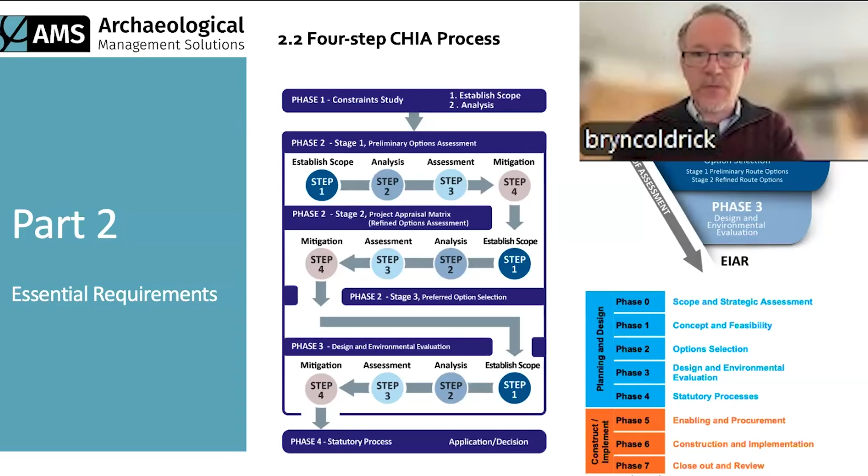Another concept that's important to understand is that as the geographical scope decreases, the intensity of the research increases. So in phase 1, for example, we start off with a very wide constraint study area. We're trying to identify the key constraints, the known constraints in that area. We're not trying to identify absolutely everything—it's impractical and unnecessary to try and do so at this early stage.

But then as we go to phase 2, where we have our option corridors, we are then undertaking more enhanced fieldwork. So we're doing site inspections, we might be doing some geophysics, and we'll cover some of the things we might be doing there. We're increasing our focus on those corridors. Then by the time we get to phase 3, where we have a preferred option, proposed project area, the intensity of the research increases even further.

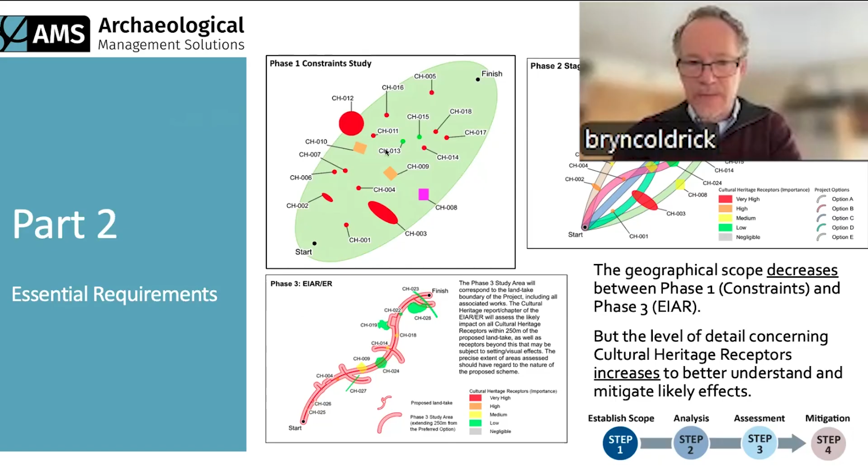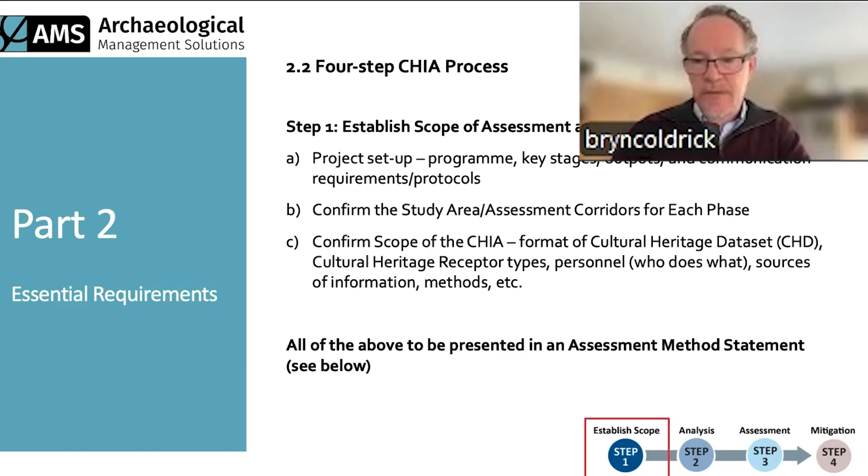If we look at the 4 steps in a bit more detail now: step 1, establish the scope of the assessment and confirm the study areas. This is all about the normal project management stuff we'd do on any project. We agree on the program, identify the key stages, the outputs, the communication requirements and protocols. We confirm our study area or corridors if we're at phase 2 and phase 3, and we confirm the scope - the format of the cultural heritage data set, the types of receptors we're looking at, who is looking at what, their credentials, the sources of information, the methods, and so on. All of this is summarized in a document known as an assessment method statement.

I won't go through everything on the screen - this is a screen grab from the guidelines, but it sets out what's required in an assessment method statement. If there are archaeologists on the call used to preparing method statements for Section 26 excavation licenses, you'd be familiar with the concept. It's a concise document summarizing the methods that are going to be followed. It's also a bespoke document, particular to the project and the receiving environment. It can refer to the guidelines we're discussing today, but it doesn't need to repeat them. This is about demonstrating familiarity with the process and conformity with the methods, but also setting out specific things like who is doing what, how the various individuals on the team relate to one another, the steps, the resources, the program. So it should be a practical, focused, project-specific document, but concise as well.

An important thing to note is that these assessment method statements are required for each phase and stage of the process, and the methodology will evolve from one stage to the next.

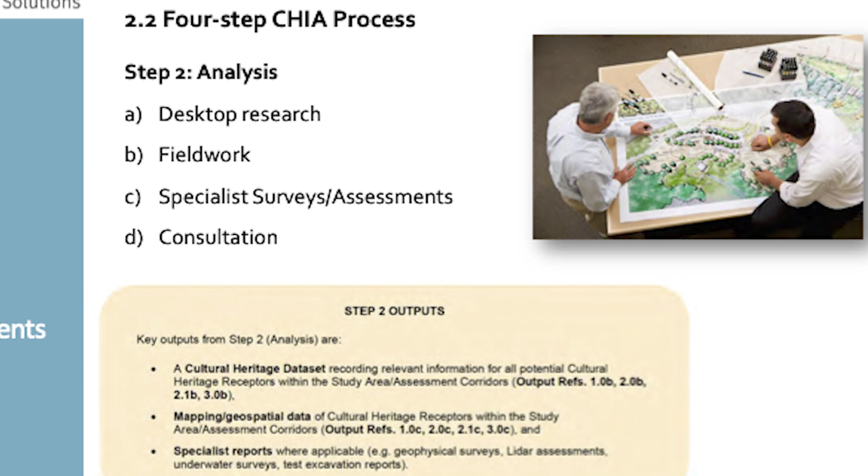So in terms of analysis, what does that involve? Well, it involves desktop research. It will involve fieldwork, not necessarily at phase 1 constraint study, but certainly in phase 2 and phase 3. It may involve specialist surveys and assessments such as LiDAR analysis and geophysics, depending again on the phase and stage, and it involves consultation. The outputs from those will be the cultural heritage data set, where this information is stored and managed, geospatial data and mapping, and if specialist reports or surveys are involved, reports for those.

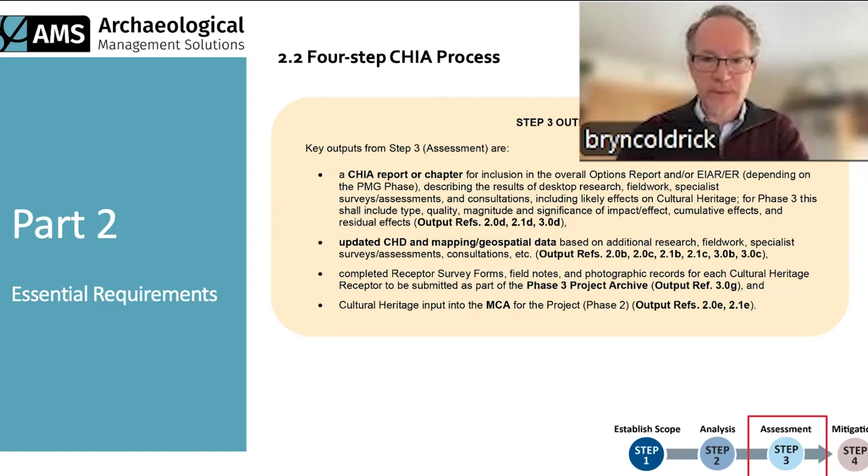Step 3 - this is something Joanne will talk about later, so I won't go into too much detail - but this is about assessing the effects and the outputs of those. Again, you're generating reports or chapters, updating your cultural heritage data set and mapping. You'll be producing a project archive if you're at phase 3, the EIA phase, and you're also having input to other forms of assessment and appraisal, such as the multi-criteria analysis, which are processes described in other TII publications.

Mitigation measures, as I mentioned before, under the EIA directive, are required to avoid, prevent, reduce, or remedy or offset significant adverse effects. These are the types of mitigation measures we need to think about. Built-in mitigation, or mitigation by design, is avoidance - we've identified key constraints, and the design team hopefully will avoid as many of those as they can. If there's a project in close proximity to a cultural heritage receptor, prevention might be one of the measures - for example, fencing off a site to make sure there are no inadvertent impacts. If an impact can't be avoided completely, perhaps it can be reduced. And then finally, if those impacts are unavoidable, we would recommend compensatory measures to remedy or offset the effects - things like excavation and then dissemination of the information that arises from that. It might be interpretation, it might be enhancement, and we'll look at some of those examples in a moment.

So for step 4, mitigation, we're identifying the appropriate measures. We're documenting all this in a cultural heritage mitigation plan, and that then feeds into the schedule of environmental commitments and the construction environmental management plan.

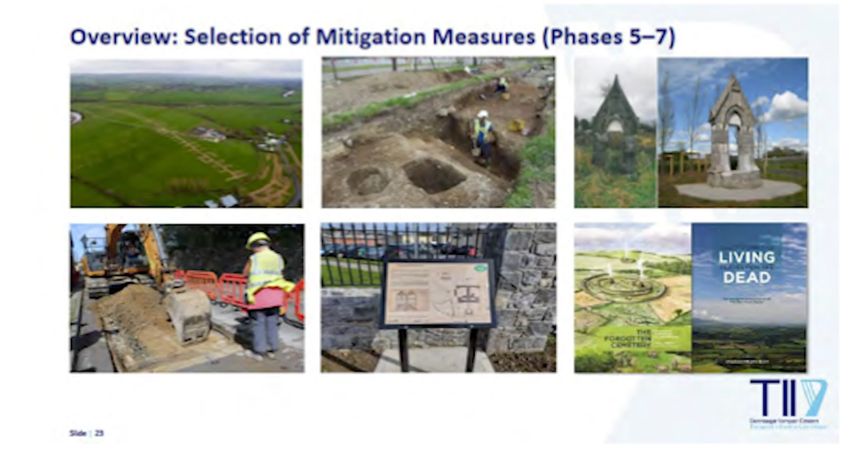So a lot of us on the call are very familiar with the sorts of mitigation measures when it comes to cultural heritage. For archaeology, there's testing, stage 1 testing post-consent once a project is nearing construction, as part of enabling works to identify any archaeological sites not previously picked up, and testing of anomalies picked up on geophysical surveys but not tested as part of the environmental evaluation. Then excavation, and the preservation by record that I mentioned earlier.

And then we have enhancement measures. There's an example there on the screen of a roadside feature, a water feature, a monument being restored as part of a project to offset some adverse effects elsewhere. And then the bottom middle there of providing interpretation is another form of enhancement compensation. If it's a greenway, we'll come back to the opportunities for greenways in a moment, but obviously this would be a core aspect of that.

Publications are a huge part of what TII does, making sure that all the information and new knowledge generated through this work is put out into the public domain for the public good. And then, monitoring for any residual risk of previously unidentified archaeology being discovered on the scheme.

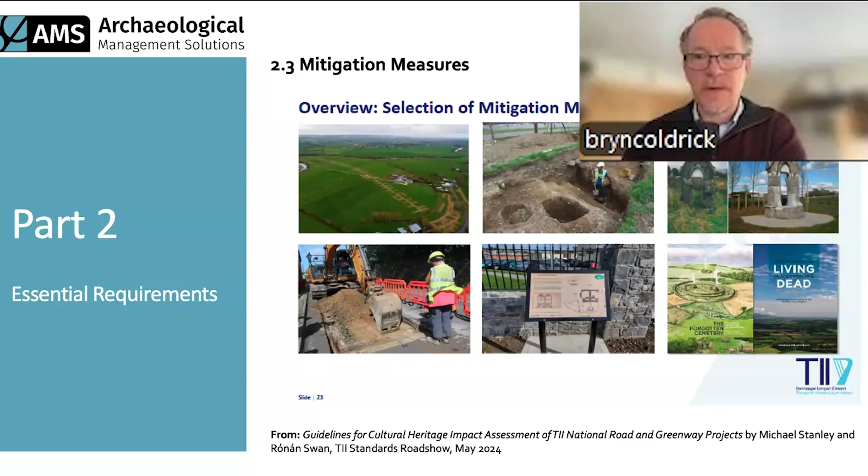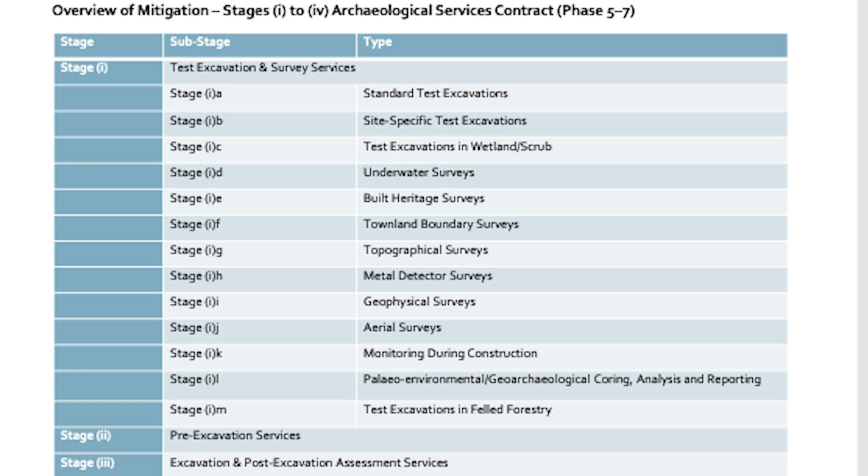And these mitigation measures then are embedded in the contracts that go out for phases 5 and 6. We're all very familiar, I'm sure, with these services that are on the screen if we're working in this industry - your test excavation and surveys, pre-ex excavation, post-excavation analysis, very important, and then dissemination of the findings and results.

So in terms of tasks and deliverables then for each of the phases, phase 1 is your constraint study for road schemes, and these are the main tasks. I've already mentioned the first task for each of these phases and stages will be preparing your assessment method statement and confirming your study areas and methodology and so on.

Then you will be carrying out your desktop research using the sources of information suggested in the guidelines, but not confined to that - they're non-exhaustive lists of suggested sources. We are identifying and mapping the receptors, identifying key constraints, particularly at the phase 1 constraint study, preparing the cultural heritage data set, and identifying any transboundary issues that need to be considered.

So if you're operating close to a county boundary or the Northern Ireland boundary, there may be transboundary issues to consider, and certainly in consultation later on. And you're preparing a constraint study report. Now for greenways, the constraint study report will generally be at phase 2, whereas at phase 1 you're generating constraints mapping primarily, but the constraints and opportunity report for greenways will be finalized in phase 2.

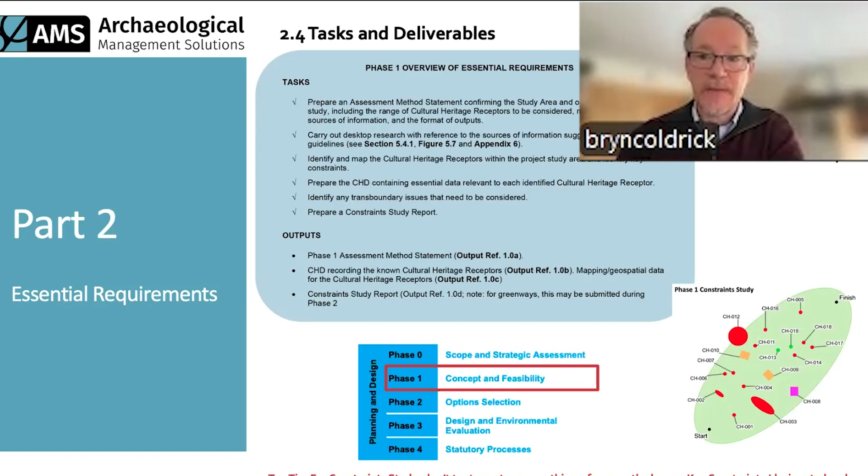So again, this is an example table for a constraint study report where we've taken some of the information from that cultural heritage data set and presented it in tabular form for the report itself. And you can see at this stage of the process that the information is fairly concise.

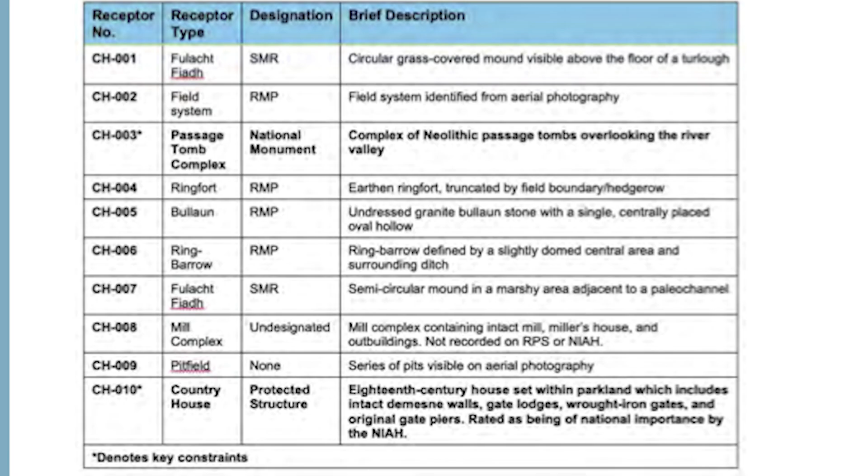Okay, so as we move on to phase 2, stage 1, the preliminary options assessment. Again, our tasks involve doing our assessment method statement again, repeating that process to confirm the methodology. We're undertaking further research, now focusing on those feasible route options that have been presented to us by the design team.

We're carrying out at this stage a survey from accessible land, getting familiar with the landscape, with the receiving environment. We're doing targeted site inspections. We don't need to do full walkovers of all the route options at this stage - that will come later on the preferred route. But we are doing targeted site inspections of specific sites that we want to go check out.

We're updating our cultural heritage data set with the information that we've gleaned from all this work. We're liaising, of course, with the project archaeologist, project manager, and other professionals on the project team. We may be commissioning specialist surveys, for example, geophysical surveys for particular things that we want to go check out. We might do LiDAR analysis as well at this stage.

And then we're reviewing the options, and Joanne will talk about that more later on. All of the information that we've gathered then is captured in our cultural heritage data set again and our report for this stage.

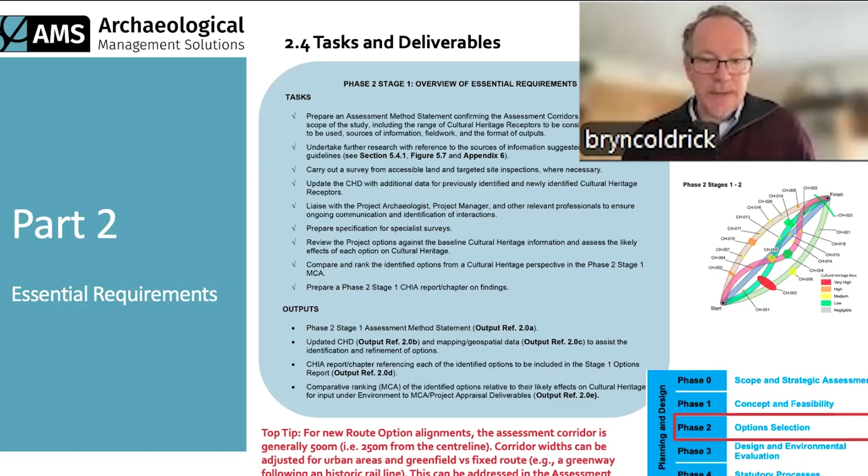Stage 2 of phase 2, this is your refined options assessment. And it's pretty much the same process, really, in terms of the methods that we're going through it again. But now we're looking at the selection of refined options.

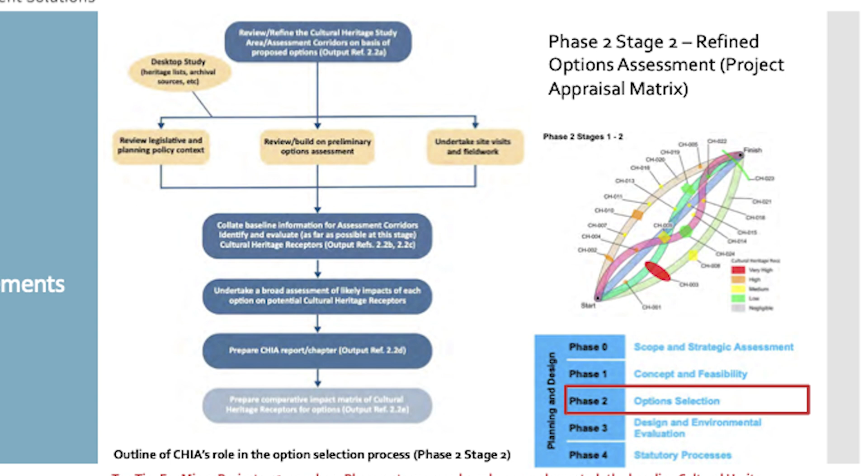This is a graphical representation of the process, just a different form, which the presentation will be made available, so you can come back to this later in your own time. I think one of the key points to just note for now is that

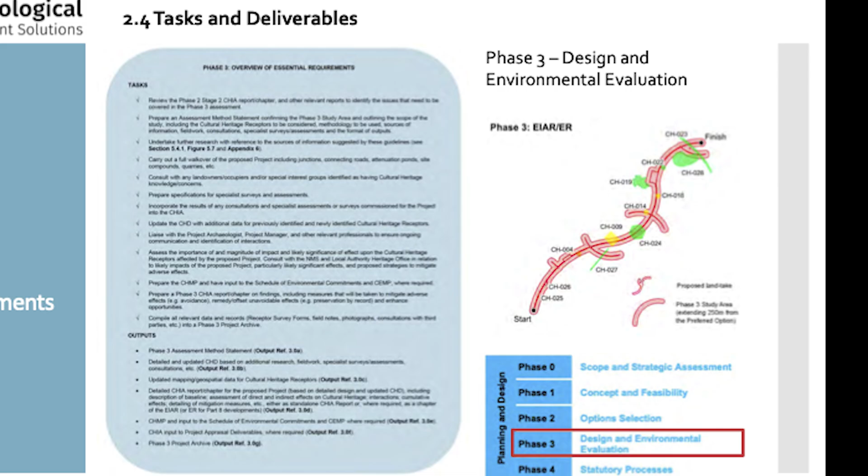for each option, the cultural heritage professional needs to provide findings of both a quantitative and a qualitative impact assessment. Joanne will talk about this more later on, but what we select as our suggested preferred option will not necessarily be the one with the lowest number of cultural heritage impacts along it. This is where the professional judgment comes in - it's not a numbers game. So there has to be both a quantitative assessment and a qualitative assessment as well.

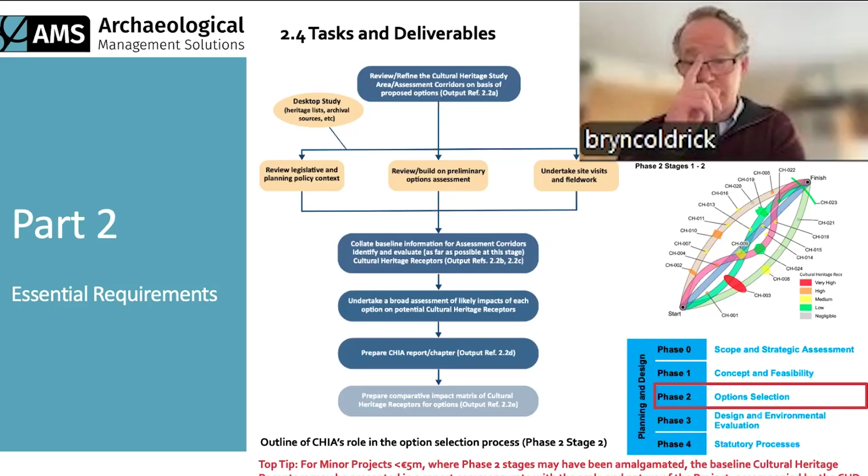Now, for minor projects less than 5 million euro, the phase 2 stages may be amalgamated. So that's just something to be aware of - it may not be broken down in stage 1, 2, 3. Those phases may be amalgamated, and so the results of the option selection from a cultural heritage point of view would then be captured in a single report to cover that process.

So phase 3 is design and environmental evaluation, or your EIA phase, if you like. This is going to be presented in an EIAR chapter or an environmental report for Part 8 schemes. This is where we have now our proposed project footprint, and our study area is pretty much the proposed CPO, and we suggest an additional 250 meters surrounding that.

And then that may need to be extended in certain cases. One of the very important things to consider is setting effects as well, which may be at a distance from the scheme, but may obviously be quite significant in some cases and need to be captured.

The process, again, is quite similar, but this time we're adding obviously more intensive research on the selected preferred route now at this stage, as the likely adverse effects are becoming more apparent. We're undertaking a full walkover at this stage of the proposed alignment and the proposed corridor. We may be undertaking those specialist assessments that I mentioned.

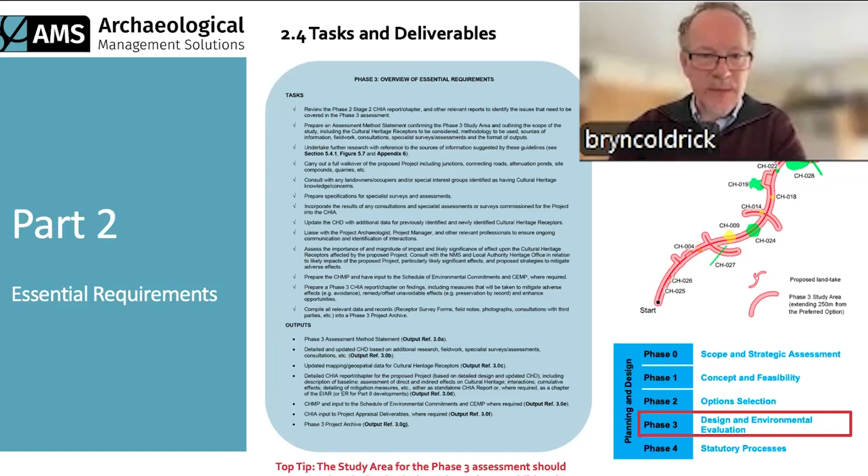And we're also at this stage now undertaking our impact assessment, so considering what the significance effect is going to be. And as I mentioned, Joanne will be covering that later. And then we come to phase 4, which is the statutory processes.

So this is where the project goes, for example, in front of An Bord Pleanála for a planning decision. The tasks required from the cultural heritage consultant are quite different now compared to other stages. One thing we're doing is reviewing submissions presented to us from the public, possibly objectors or people with concerns about the impact, and we're responding and formulating responses on behalf of the project.

We may have to prepare errata for the original EIAR chapter if we find new information or mistakes. These things happen. We're also preparing a brief of evidence if there's going to be a public oral hearing, and we may be called to give evidence as a cultural heritage expert witness.

We're having input, as I mentioned before, on the schedule of environmental commitments. We're updating the cultural heritage mitigation plan that informs that. We are reviewing and reporting on any cultural heritage aspects addressed in the planning decision from the competent authority. We're providing input on the construction environmental management plan, and drafting method statements to accompany license applications for archaeological works.

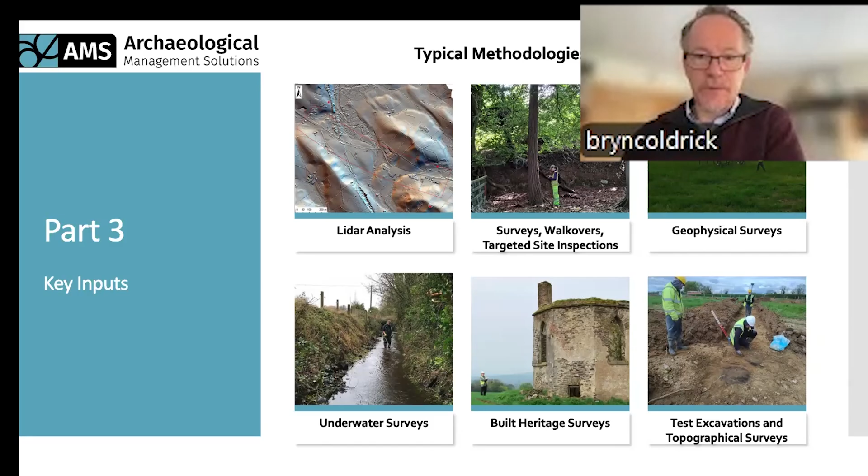These are the types of methodologies in terms of fieldwork and specialist assessments that a lot of us would be very familiar with - LiDAR analysis, fieldwork surveys, walkover site inspections, geophysical surveys, underwater surveys, built heritage surveys. Particularly when dealing with specific structures of architectural heritage significance, it's very important we have people on board who have the competency to interpret those and understand their special interest. Test excavations and topographical surveys, and geophysical and underwater surveys, of course, would all be undertaken under a license.

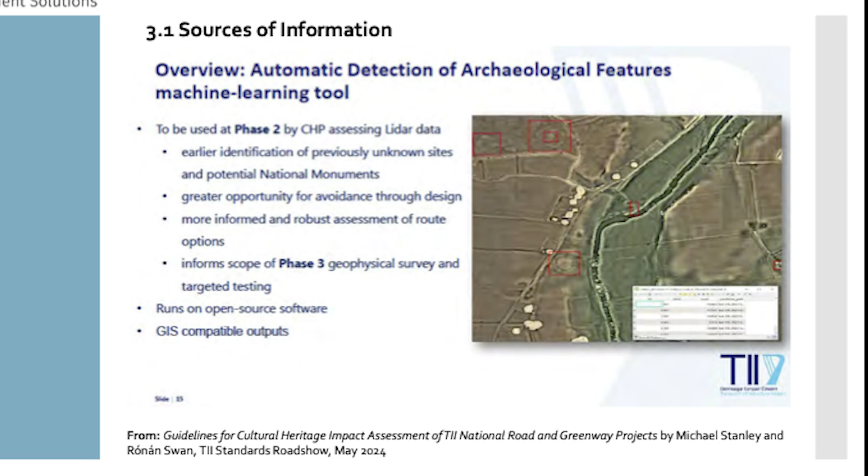If people are not familiar with this, this is the new automatic detection of archaeological features - it's a machine learning tool. TII have published some guidance on this. If you go to TII's publications and search for the guidelines on cultural heritage impact assessment that Michael Stanley and Ronan Swan put together, you can see these slides here, and there are links as well to that and to the guidelines that support it. Important to check those out.

Consultation, as I mentioned, during phase 2 and phase 3 - those phases will be informed by engagement with stakeholders. The level of engagement needs to be tailored to the specific circumstances, scale, and complexity of the project and the various phases and stages we're operating at. Consultation with the statutory consultees is normally carried out by the project team, with the involvement of project archaeologists and possibly the cultural heritage consultant as required or professional.

This is consultation with the National Monuments Service, for example, in terms of agreeing a strategy for archaeological investigations - geophysics, underwater surveys, and so on, test excavations perhaps. As we go through phase 3, we work closely with the National Monuments Service to develop the mitigation strategy for archaeology. If we're dealing with built heritage, there's the National Built Heritage Service within the department who should also be consulted. And then, of course, we have our local authority heritage officers and architectural conservation officers who need to be consulted as well at appropriate stages.

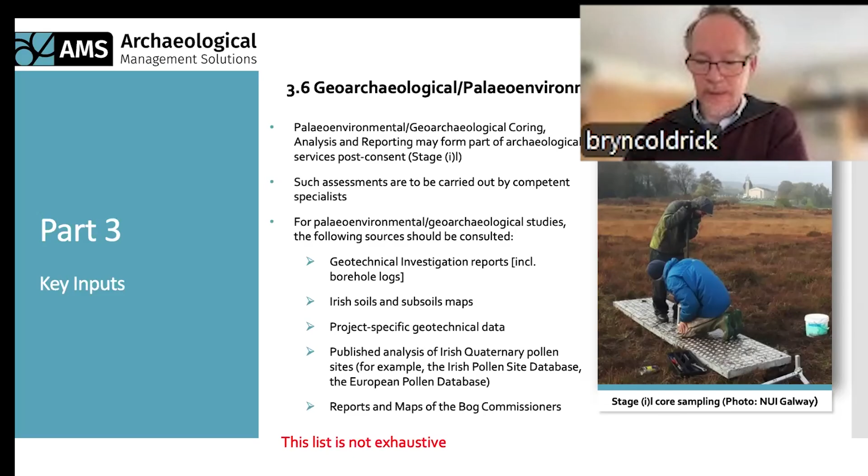There's a question that came in via email. Something that is not addressed in the guidelines but comes up at emerging preferred route stage, early EIA stage, is site investigations, especially for road schemes where they need to be screened, since works within zones of notification require Section 12 notification as the project is pre-planning at that stage, rather than having gone through the planning process, which removes the requirement for Section 12 notification. I think this is important as questions could be asked at oral hearing as to what archaeological works were done at SI stage.

Ronan responded: on a lot of the schemes at the moment, we will assess which site investigations require archaeological monitoring, or indeed on a number of schemes we'll actually request the site investigations be targeted at particular archaeological issues. It's an important point that site investigation logs and borehole records are considered part of the archaeological record by the cultural heritage professional, and in some cases those works are actually archaeologically monitored by the CHP during the works.